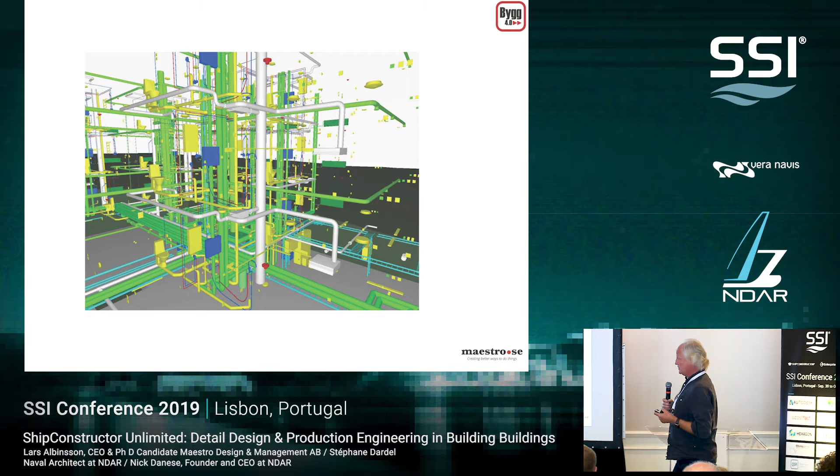The inefficiency today in the industry—while this looks kind of impressive for somebody, this model is terribly incomplete. At least half of the stuff is missing. And if we look at this, these are the electrical things. It should—could you—I don't know if I'm supposed to. You have PowerPoint? I really don't. Let's go back, it's an animation of that. Can I? Or should I go back?

It's all the electrical part. But you see that it seems like it's all wireless, right? Because they don't model where the cable should go, anything like that. And the 3D models they use for, like, the big circuit box in your apartment, it's just a box. It doesn't have the bolts. There are no holes where you need to connect stuff, so you can't do any material takeoff or anything. But even worse, they don't make time plans or plan for how to build it. They have this rough model of the ready building, but there is no work on exactly how you would go about building it. So what happens is that on site, while you're actually building it, you solve all these problems—where to run the electrical things, where to cut the ventilation, etc.—on site. This is a typical way they do it. And of course, because you do it by hand and systems are more complex today, that's why you have this enormously ineffective and worsening industry.

So even if you say, oh, ship people should do better, and we're not the masters—compared to this, you're 20 years ahead. That's why we are interested in trying to use software like ShipConstructor. It's been really great to have the support of you guys, and Stefan, who is actually using it for a real factory. Yes, thank you.

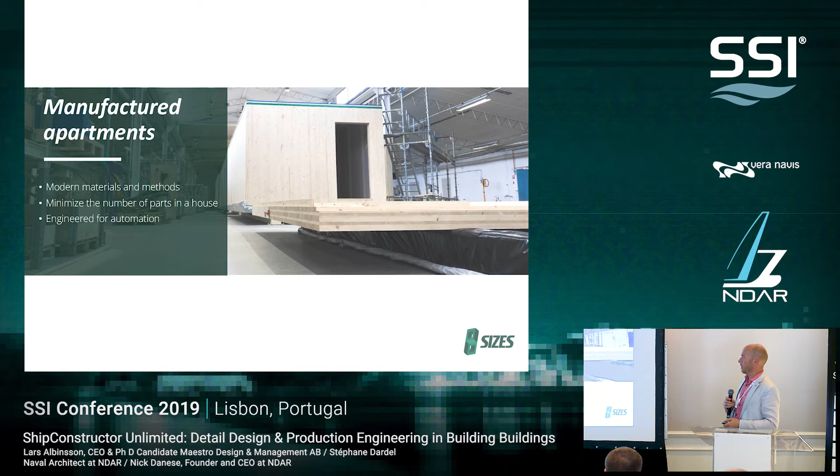We started constructing this. It's a system. It's very flexible, but it's made up by standardized components such as walls, floors, etc. And we try to minimize the number of parts to make this ready for automation.

Today it's very much still manual work inside a factory, but it's all aimed at finalizing a product that's ready for automation.

This will lead up to, or already led up to, a very much shorter time to deliver a finished house. We are also today actually having our new guests in our first finished project in Sweden. It's this house you see here that also has 2 sister houses outside of the picture with 32 apartments.

Traditionally, it takes somewhere between 4 to 8 months to do the engineering of a house, and it pretty much continues until the house is finished. We aim for something like 4 to 8 weeks instead.

And this is where ShipConstructor comes in as a major part of this. So we want to do, after the architect's done, we want to bring it all into a 3D model in ShipConstructor, and the enterprise platform is really what compels me a lot.

We have gotten as far as 6 weeks into this, so we're brand new to this. But I'm very eager to see where we can get with this.

First, in the manual production sequence, where we can use the enterprise platform to digitalize our drawings and update on the shop floor. Then in the next step, to bring it to something like what we saw with the robots. We won't have welding robots since we're working with wood, but we will have cutting machines, for example, where we can bring data straight down from ShipConstructor and automate something like 40% of this process.

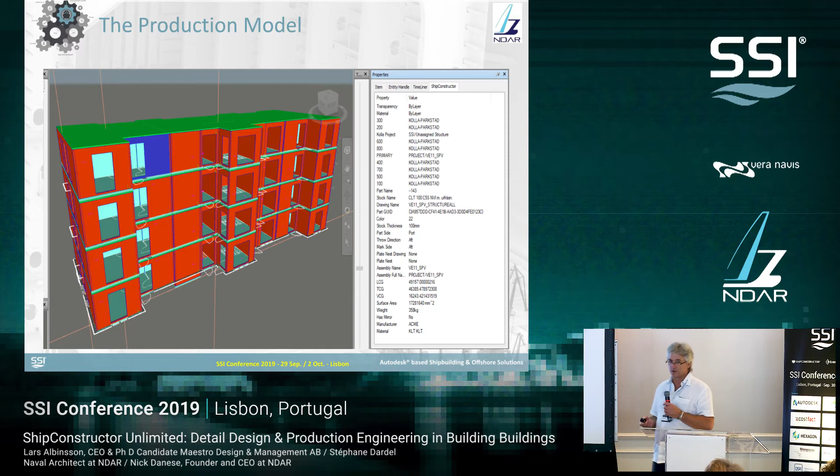And the focal point was Revit, because Revit is one of the Autodesk programs that is used mostly in civil architecture, not engineering really, but there are parts of it which are engineering. In Revit, you run pipes. In Revit, you do insulation. In Revit, you have some sort of electrical models. So why is Revit not going all the way to the production like we do? We have design, we have engineering, and we have production.

Not for me. So that took a bunch of investigation, and I took the time to go and talk with Autodesk people more and more, and you have to thank them for having been available because, of course, at first the feeling is, wow, you're going to pull the carpet from under my feet. But in truth, the bottom line and the conclusion of this was that Revit is a fantastic tool to create your initial model, just like we do with Rhino, just like we do with some parts of ShipConstructor.

And then we make the renderings, and then we do the hydrostatic analysis. It's fantastic for that, and in fact it gives a huge amount of extremely useful information from early on, but that's where it stops. Not because you can't do it, but because it is not the right tool to go to the production stages, and then some parts are missing. And what looks like an overlap is in fact a fantastic synergy.

Why? Because with Revit, we can start with an early model. You get bills of materials very quickly. You have 3D drawings, models, 2D drawings. You can go to Excel, you can export to Excel to ERP, you can support purchasing, and you can support planning at a relatively macroscopic level.

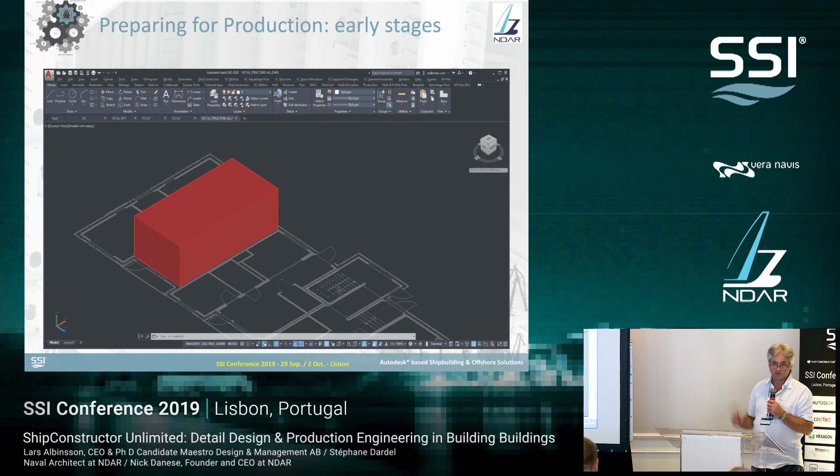And in practice, this is where it works. You take a 2D plan coming from a Revit model, which is just a section - we'll see later this is a simplified plan where we've hidden a lot of the drawing - and you make a box. Why? Because this box is going to be your volume element - the faces of that cabin that's going to be built in the assembly line, not in the carpentry shop, but in the assembly line, which is very different. The convention is very simple: the outside faces are the inside of the CLT panels.

The top face is the underside of the ceiling panel, and the bottom, which we don't see here, is the top level of the bottom panel. Why? Because then we extrude to the outside, and we don't have collisions with the walls. And then, of course, the walls will have to be cut to fit according to the scheme decided for that particular volume element.

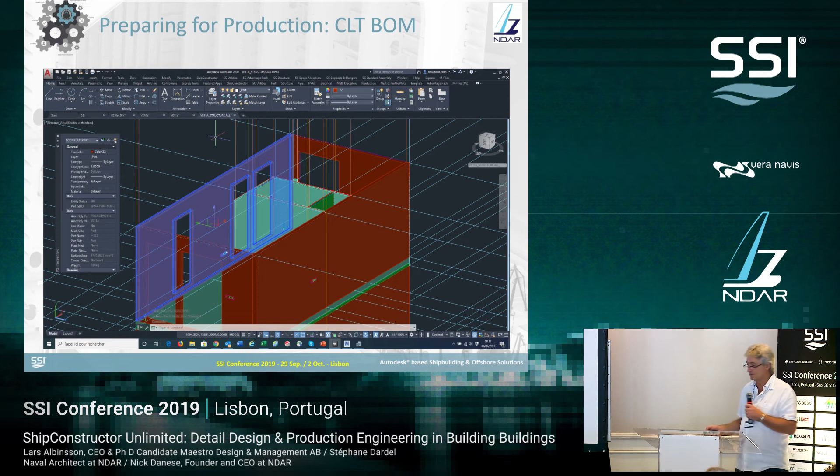But in the first calculation, you don't really care about 10 centimeters of overlap, because that's not going to change your final supply and your final order significantly anyway. And then, just by using structure plate elements, 25 centimeters thick or 10 centimeters thick, we make the walls, we make the floor platform, and we make the ceiling, which is hidden in this case.

You cut the openings, and then you start placing in your equipment parts. The doors, the windows, the furniture, etc., which come either from Rhino or from Revit or from the suppliers or whoever. But right now, I have an exact measure of this panel.

The weight and the center of gravity, which are important, because when I put it on the truck, I have to know that this thing weighs 18 tons and not 27 tons. I have to know where the center of gravity is when I pick it up with my forklift, that it doesn't tilt over to one side, etc.

Also, the weight is very important, because when you do your structural calculations, the bottom floor holds the whole building up. So there is a structural constraint there, which says not only vertical pressure, but if my vertical mass is going to cause any movement in the structure, yes, it is very strong, but any movement in the structure, I could get a situation where I have torsion that involves a weakness.

So very important. And it's like we know with ships, the moment I've done this, I have the exact number, and that number is often a report to the structural engineer, and every day he gets an update with the model so he can see exactly what it is.

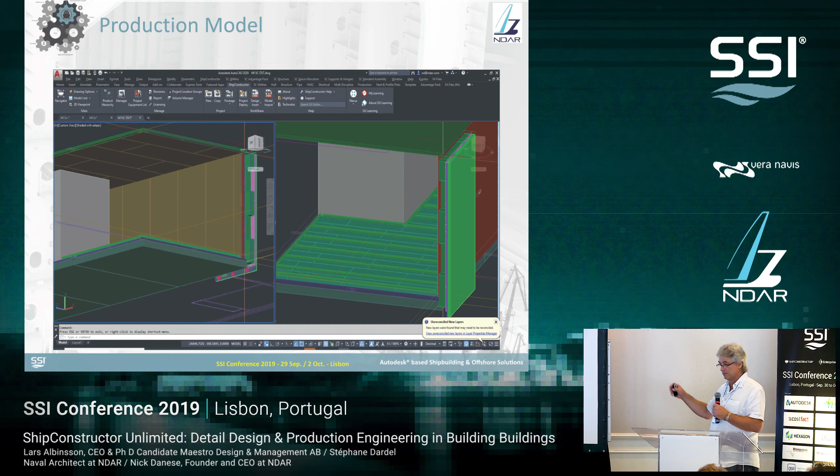So you use a single planar group as long as it is practical, and particularly if you have several people working on it, you simply transfer your parts to other planar groups, and several people can work on the detailing of the walls, the floor, the ceiling, the bathroom, whatever. But the initial model done in a single file by a single person, you're looking at many hours, not necessarily many days.

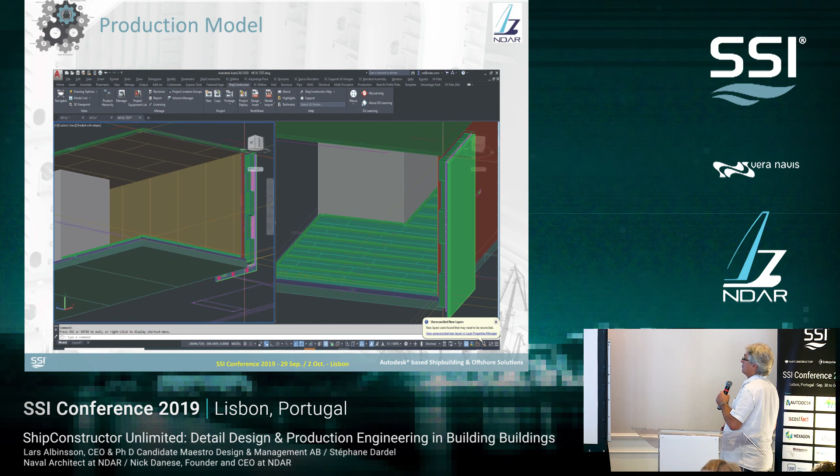So what I did here was, in the assembly drawing, not in the planar group, I simply picked the parts, and I explored different ways of picking up the parts, since I hadn't done it in a while. How did I pick them up? I picked them up with Quick Select.

The AutoCAD Quick Select lets you select parts by stock in your drawing. So I called in for the stock of this mineral wool, these panels, for this mineral wool, for these wooden battens, for this other type of mineral wool, and for the gypsum. You select by stock, all the parts are selected, or just click, move, click, specify how much in one direction in world coordinates, 750, and there you go.

Instead of doing automatic labeling, because these are obviously all the same materials, I just use the manual labeling from the bill of materials. When I click on it, it knows that it is part number 1 in the list, and so on, and the tag goes there. So you actually find them - this is 16, this is 20, 22 in the list, and this is done.

So once you have one of these - this is not a fabrication drawing, but an explanation drawing for the work team. And then, of course, in parallel with this, we have the layer by layer assembly drawings.

So each task is going to be: I received this panel. It already has the gypsum board because that happened at the previous station. The first team puts these down, but now I know what they are. So just like we do with plate nesting, I nest these, and I immediately get the quantity of raw panels that I have to purchase.

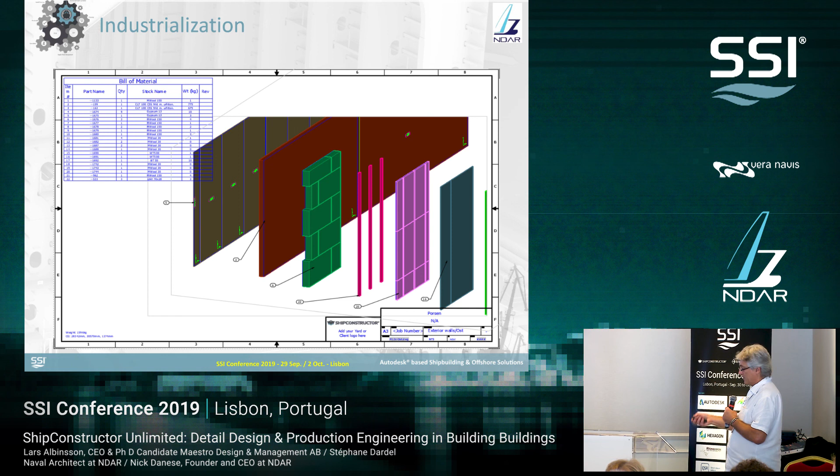And the labels I'm going to preprint because I have all this information in my bill of materials. So I push it out to text, to CSV, to Excel, and just like these labels which come from a file, all of those labels come from a file, and I just staple it to my wood. Same here - some of these are full size and some of them are not. But this is the industrialization of a one-off.

And just like the 9-axis robot, the ones that weld 3D double curvature one-off panels, in this case what we're going to standardize is the drawings, the documents. They will all be standard. So one day to the next, today a guy is going to assemble this wall, tomorrow the floor, the next day perhaps something else. But the drawing appearance and the contents of the drawing is what becomes the company standard. The content comes from the model.

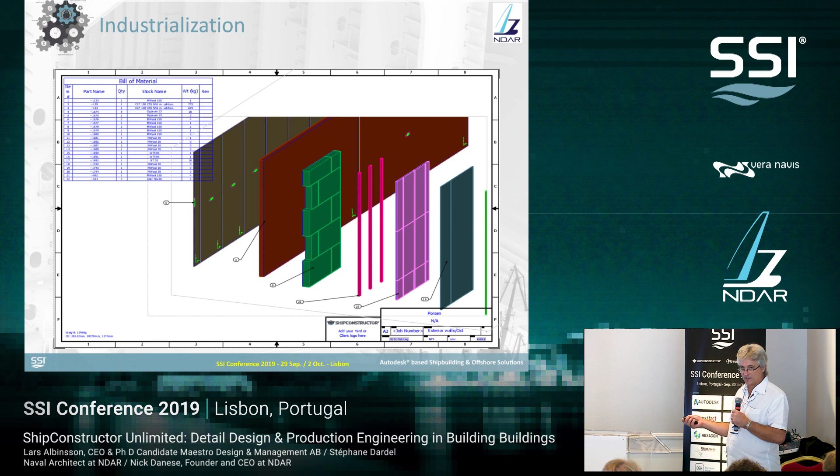And this is the beginning of a great adventure, and I really look forward to doing it. That's it. And now we have the coffee break. You bet.